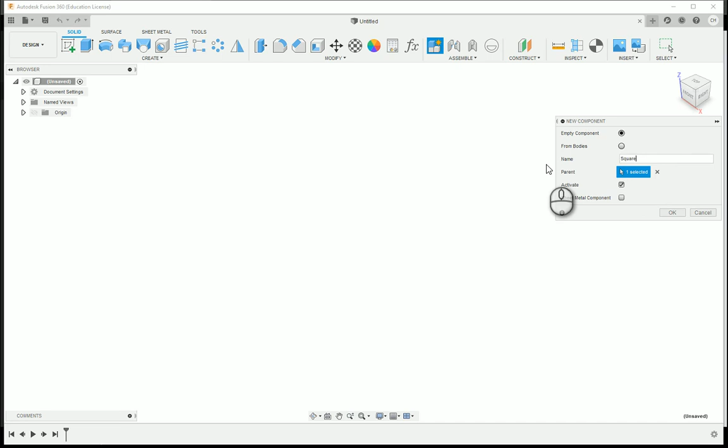Our first step is to start off with a new component. I'm going to go ahead and call this the square column, and I'm going to say OK. Then I'm going to start off with having a new sketch, and I'm going to choose the top plane.

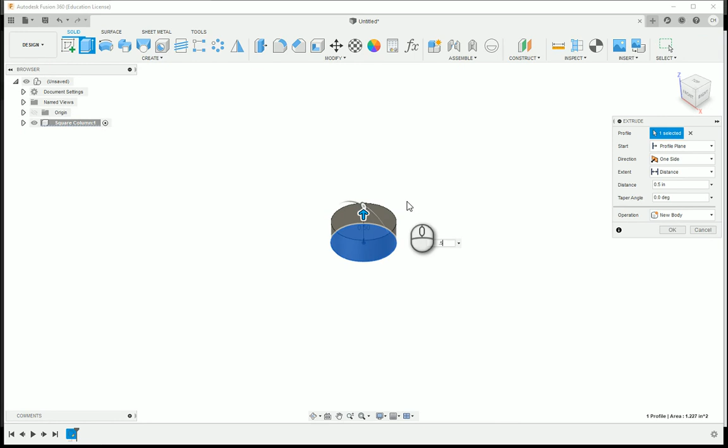I'm going to start from the bottom and work our way up from the center diameter. This is going to have a diameter of 1.25. This is fully constrained, so I can go ahead and finish the sketch and extrude. The thickness on this is going to be 0.5, and I can go ahead and say OK.

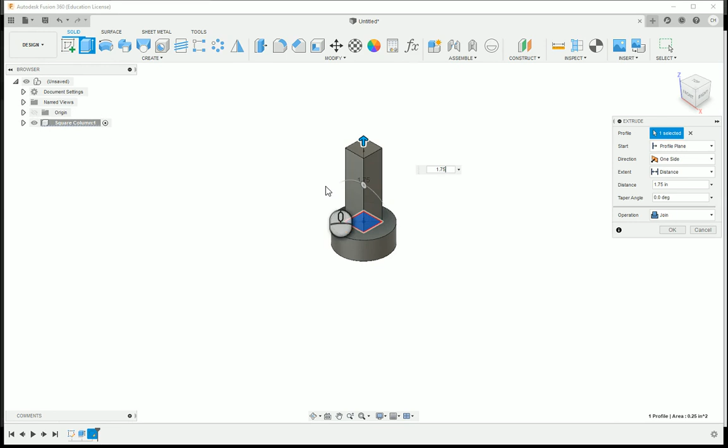I'm going to say Create Sketch, click the top of the cylinder. I'm going to use a center rectangle. Click on the origin, and I'm going to do a 0.5 by 0.5 width on this and finish the sketch. Extrude, choosing that's going to be 1.75 for the extrusion height, and then I can go ahead and say OK.

Clicking Create Sketch again, I can click the top, and then I can go ahead and choose the center diameter circle. Here I can click on the outside edge. If you notice, just because I clicked the outside edge doesn't mean that it applied a dimension. So I'm going to go ahead and set this at 1.25.

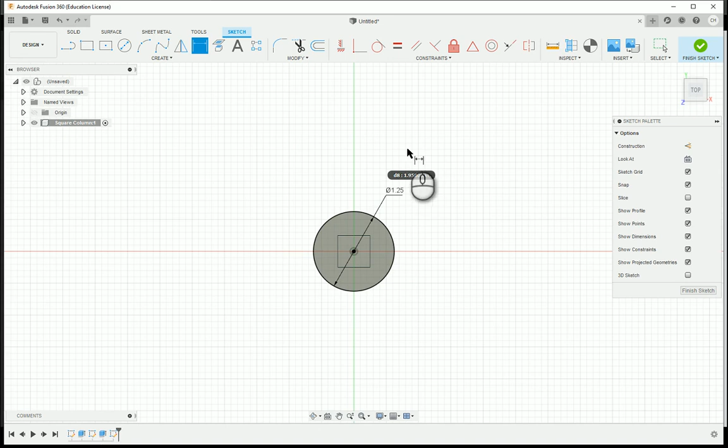Finishing the sketch and then doing an extrusion. I do want to make sure I click both the entire surface up there. We're going to do 0.25 for our height, and I'm going to say OK.

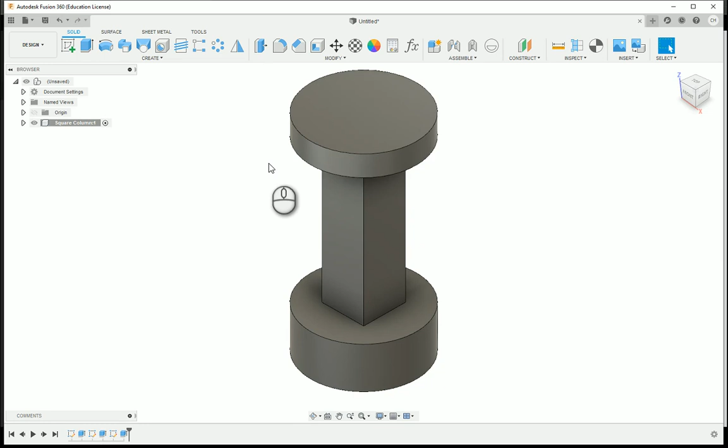We have a series of 3 holes that are going to show up here on our part. The one thing that we may go through and utilize is I'm going to go ahead and create a new sketch. At this point, your students may not be familiar with the hole command, so we'll go ahead and show how to do this with circles.

So one thing is, let's go ahead and utilize some geometric constraints. Here's equal. All these are going to be the same, so I'm going to do equal between each one of these circles. And then I can use my dimension tool here.

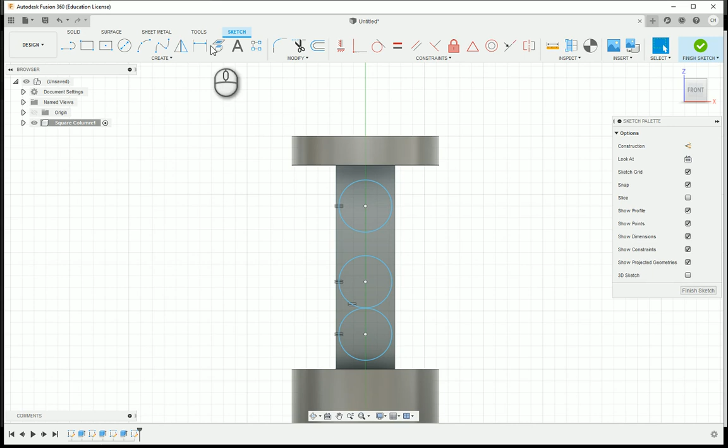So from the center point, you'll notice that I'm not able—there we go, I'm able to click now the top of that. So from this circle to this one is going to be 0.5, and you'll see it kind of kicked out on us, but that's okay. Then from this circle to here is going to be 0.5 as well. You'll see they've kind of moved a little bit on us.

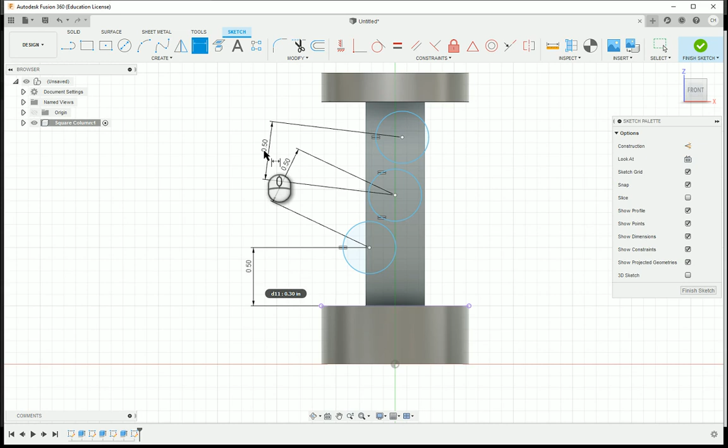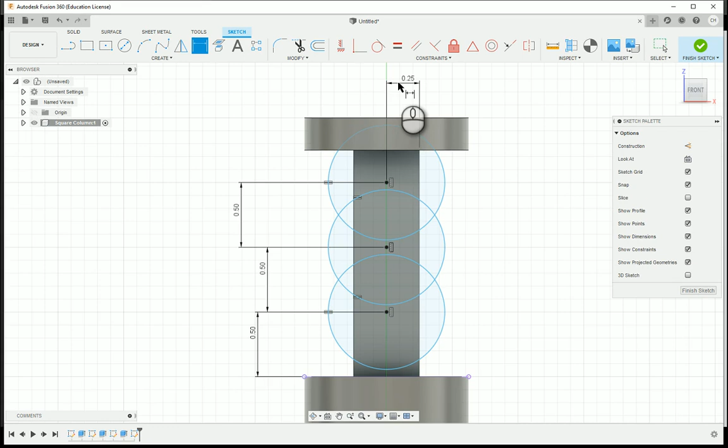But what we can do, utilizing horizontal vertical constraints, I can choose the center of each one of these circles, and these will help us out there. Dimension wise, it looks like a lot is moving around, but when I go through and set in from the edge to the center of the circle at 0.25, that'll locate them. And then when I set the diameter at 0.25, all those, because of those equal constraints, will fall into line.

I'm going to finish the sketch. I'm going to extrude, and as I extrude, I'm going to select all 3 of these parts. Since they're going to have the same depth, I'm going to set it to all distance, so they go all the way through, and I can go ahead and say OK.

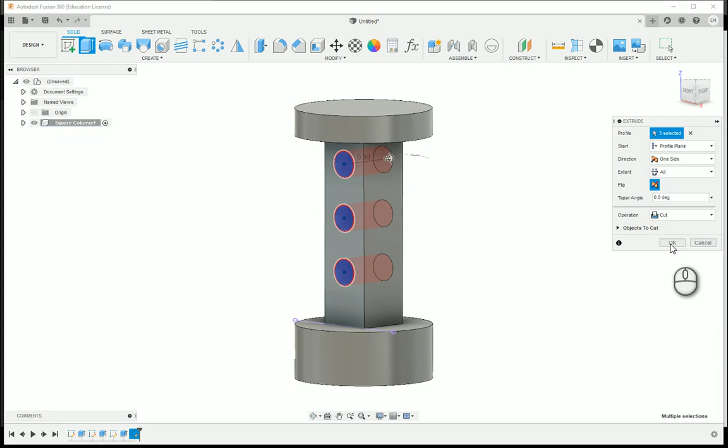So that will go through and give me my square column construction block to finish out for number 9.